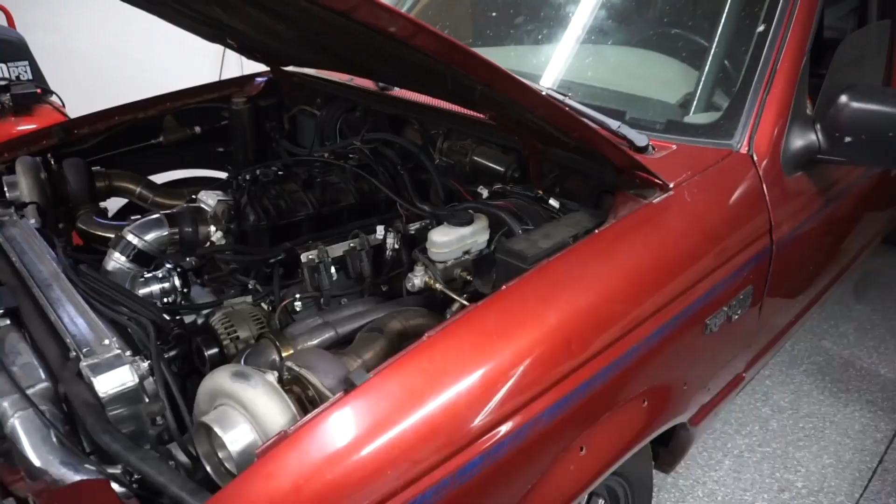So last video at the track, I put the 4-port on it, and I've been kind of working through finding the duty cycle settings. So doing some digging around and talking to other people, I decided to try something a little different with the boost control.

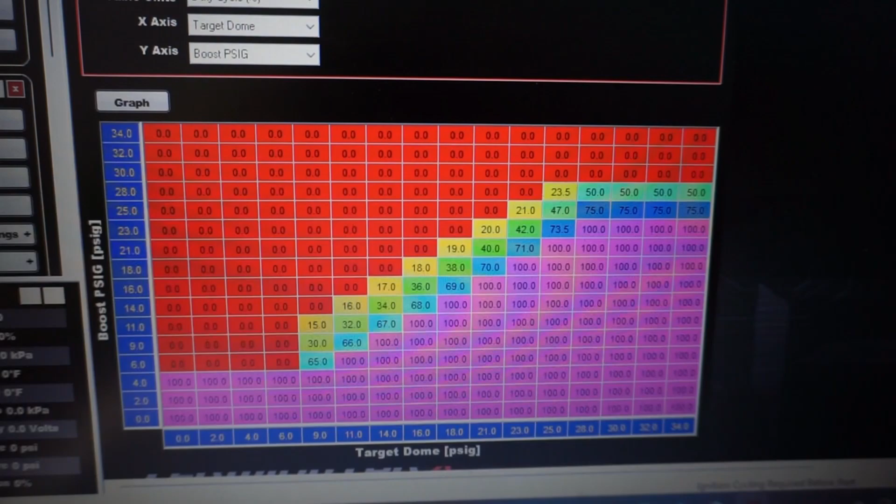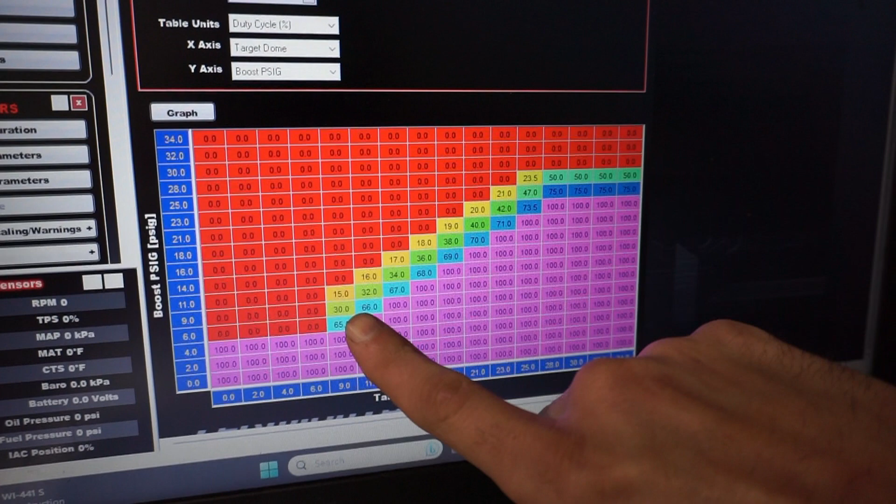So I built this little table here that uses target dome and boost pressure. This is actually using boost PSIG versus a target dome setting. And I forgot to mention it, but this does not use a dome sensor. It does not use the dome map or anything. It just uses map pressure and compares it to target boost. So it doesn't burn an input, doesn't need a dome sensor.

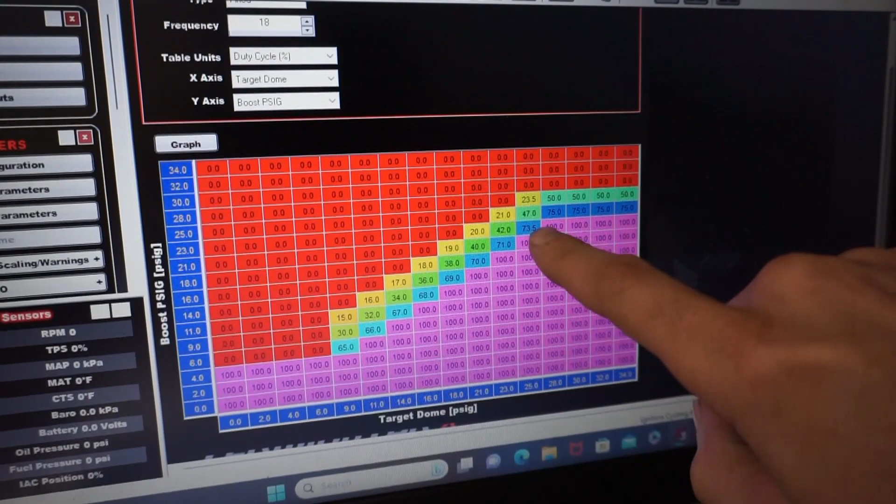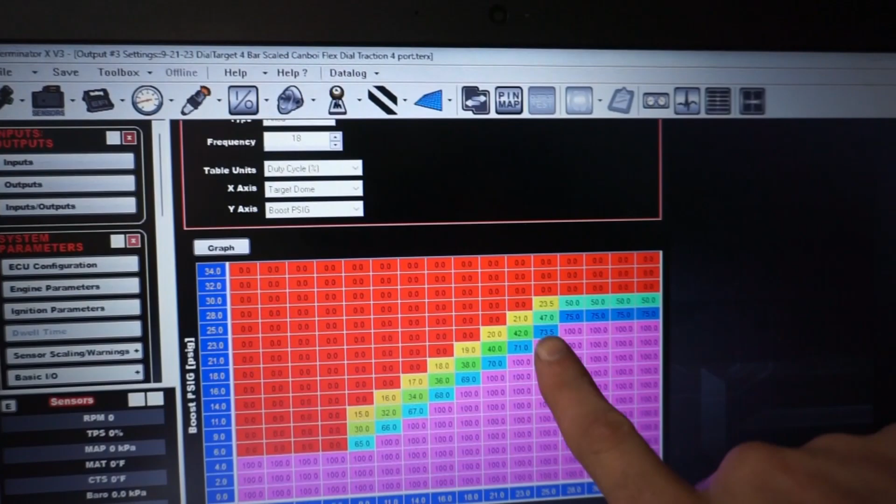Essentially all through this range would be like my guess for a duty cycle, what this is going to be. And what I did here is I used my same settings, or similar settings that I used in my Yellow Mustang. The Yellow Mustang was also a twin turbo setup, and it had twin 44mm wastegates with 6-pound springs in it. So I was using 15 hertz, and about 47% on that one made 22 pounds. So I'm using similar settings here, 18 hertz, and 47 is I just have it targeting around 25.

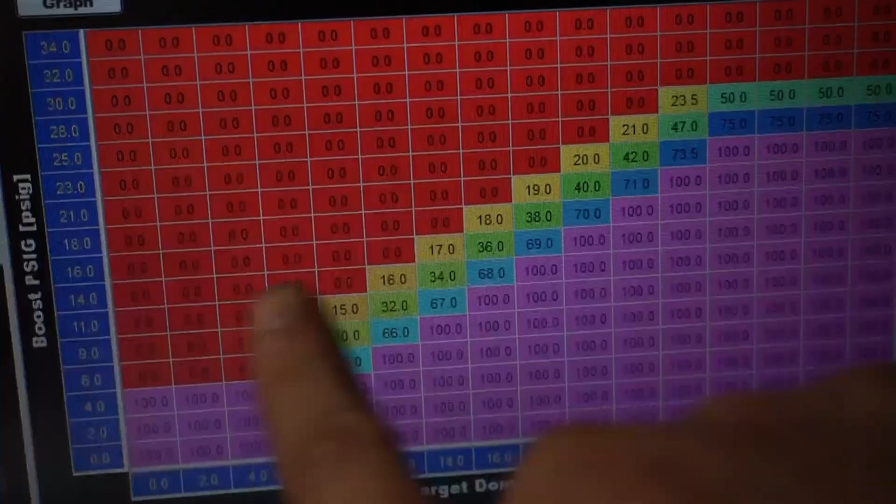So what this table is going to do is these green ones are like my target for what it should make, like if I go 18 pounds and 18 pounds, so this is what I'm targeting, and then this is going to be what actual boost it's making. So then it's going to give it duty until it gets to this target range, and then if it overshoots, it will pull duty cycle out of it, hopefully to keep it back in that range.

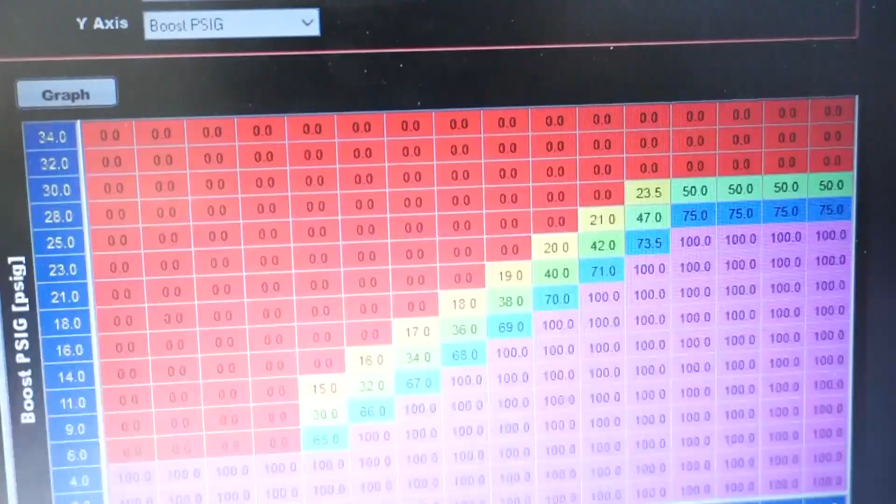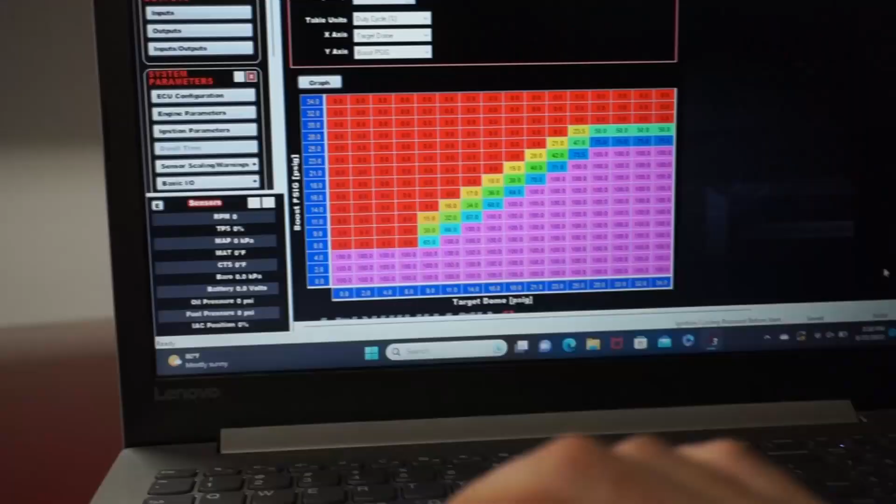And then at around 30, 28 to 30, it just goes to 0. So even if it does overshoot, it kind of has like a built-in revert-to-wastegate feature, because it just drops it down to 0 duty if it goes over 30. So I'll go over this a little bit deeper when I get it to work with the screen recording.

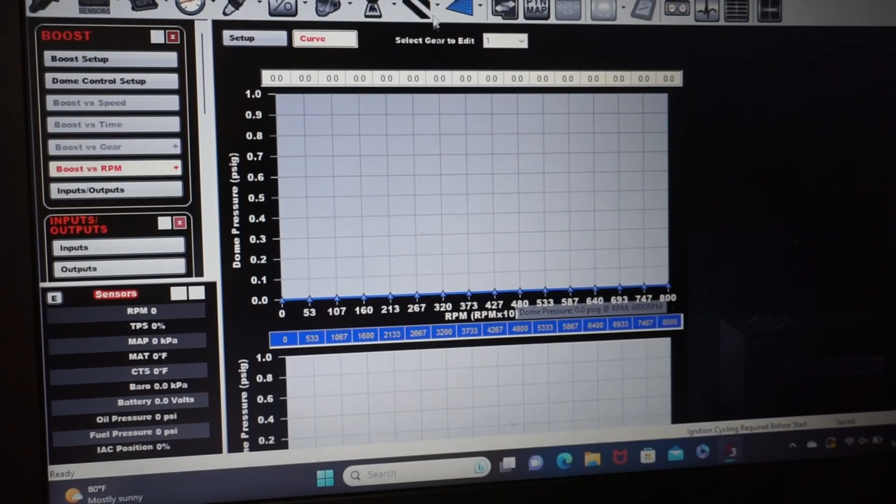But essentially what I'm doing here is I'm using the boost versus RPM, and then I'm offsetting this table with a 2D table. My 2D table, because I'm using the dial-a-boost, I wanted to make that work. So essentially what I have is RPM versus dial position, and then I changed all my dial numbers to match what my target boost number should be.

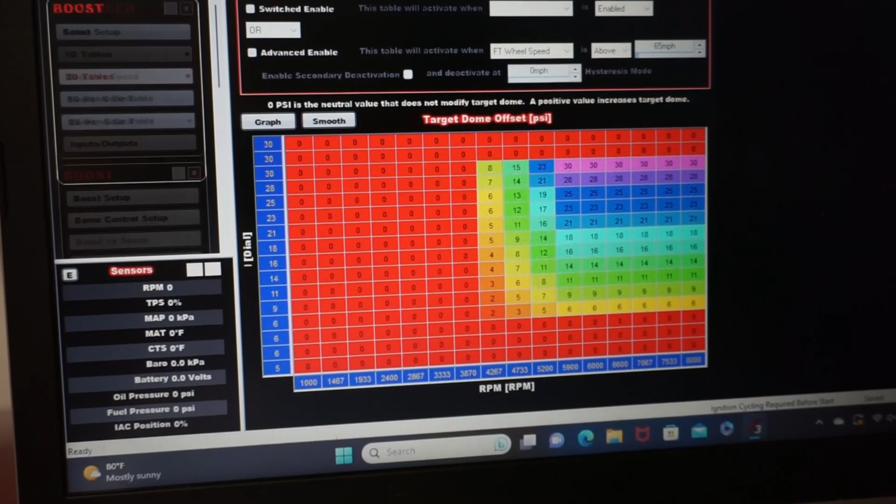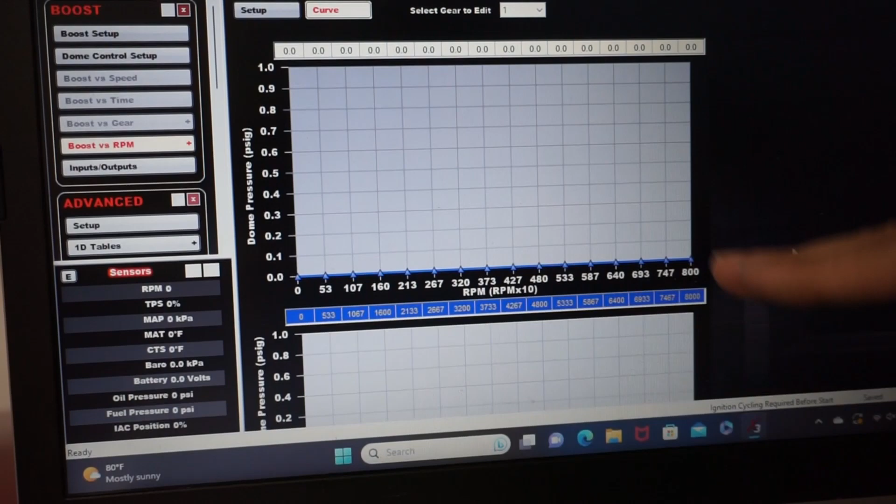So like 6 down here all the way down is 6 pounds of boost because it's a 6-pound spring, and it makes about 6.5. And then as I turn it up, what these numbers are going to be doing is offsetting this boost versus RPM curve. So those numbers are going to be offsetting this one as I turn it up. Then I don't have to mess with this table at all. And then it'll apply for each of my boost settings.

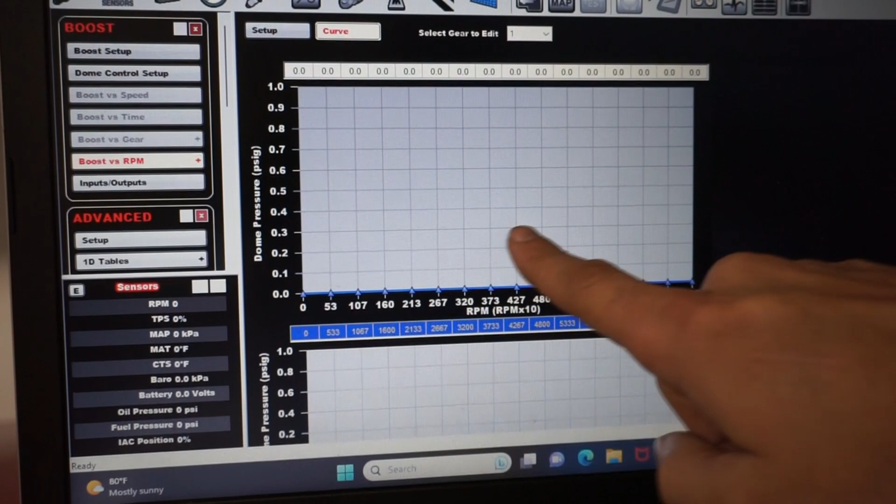Because if I were to just offset this whole table, like if I go to 6 and then I decide I want to offset that table with the dial-a-boost, if I add 10, it's also going to add 10 to my low RPM, which I don't really want to do. I want to have my low RPM and launching stuff still around the same, but then just ramp it up. So I'll go over that in a little more detail.

I'm going to go take it out and go drive it a little bit and try to dial in some of the numbers. I haven't driven it on this yet, but the concept is there in my head. I feel like it should work.

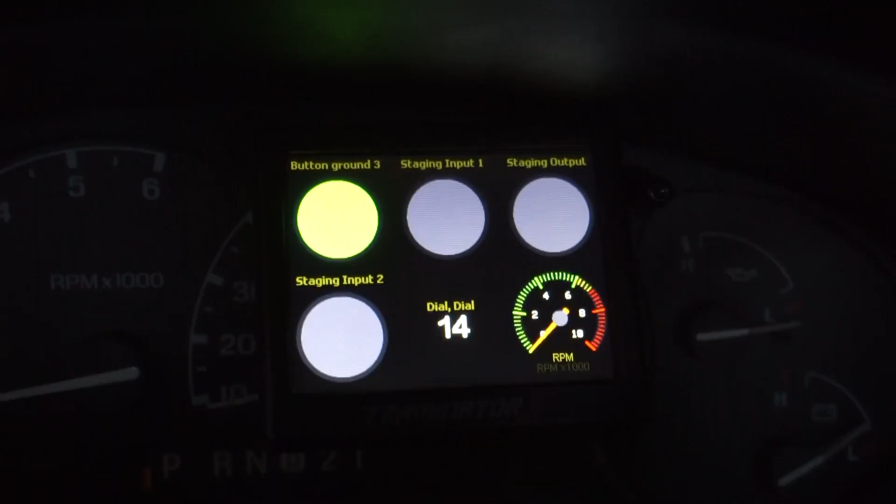And then I also changed how I'm doing my trans brake and bump. I'm not using the staging input output. I made some custom output tables for brake and bump, so I can go over that stuff too if I get that to work.

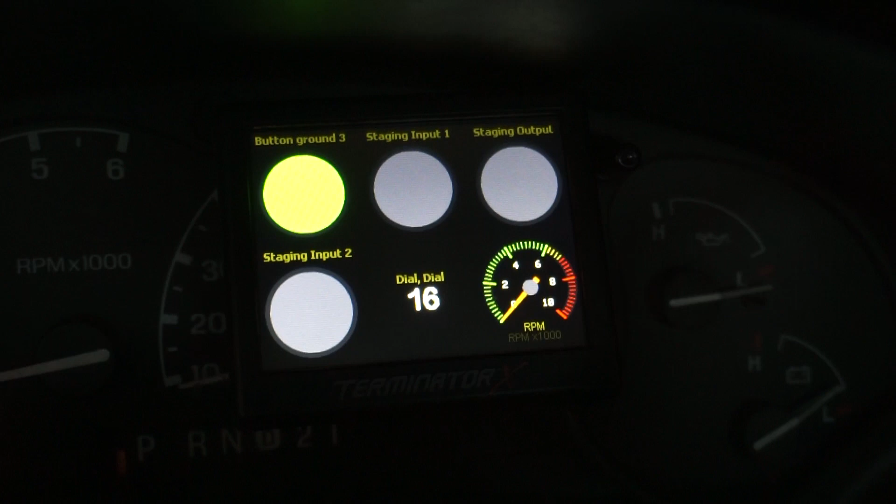And essentially what I have now on the dial, all of these numbers represent a target boost number. So I want it to target 6, it's all the way down right now. That's at 6, all the way up will be 30. So the dial number corresponds to what the boost number should be. So what I'll do is like 16 pounds, I'll dial it in right there, whatever the duty cycle is that it needs to make 16 pounds.

That's what I'll put on that one. And then I'll just continue to do that. So that way I don't just have like a 1 through 10 or up or down, I know exactly what the target's going to be.

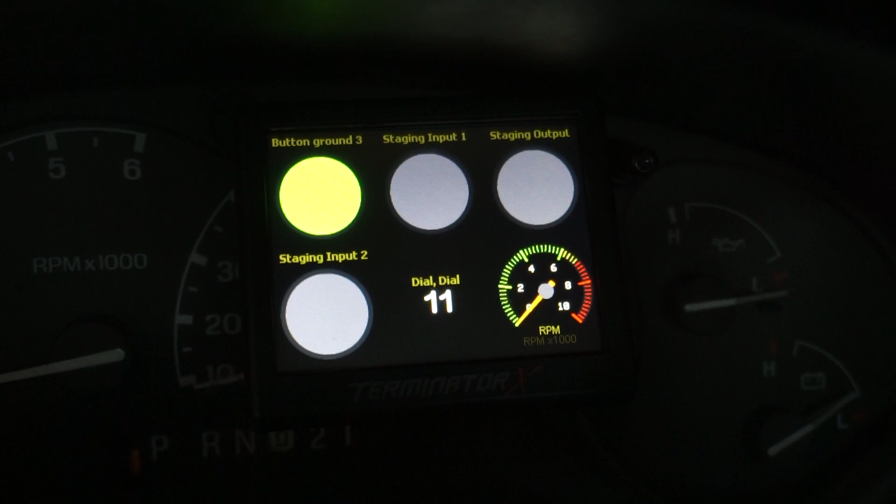All right, well, I figured I'd do some recording because I was just doing some trans brake testing, and now I just hurt my neck. So it went from not bumping at all to way aggressive, and I wasn't expecting it, and now my neck is actually sore. So what I've been doing is kind of creeping down on it. I started at 16 hertz, and then I went 50% duty cycle, and I was creeping down the duty cycle until I got to 16 and 33, which is where I was on the single pulse before.

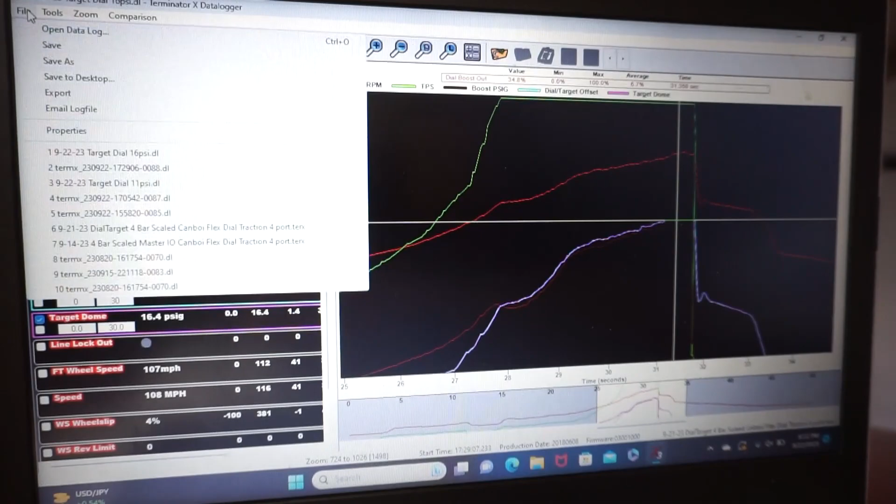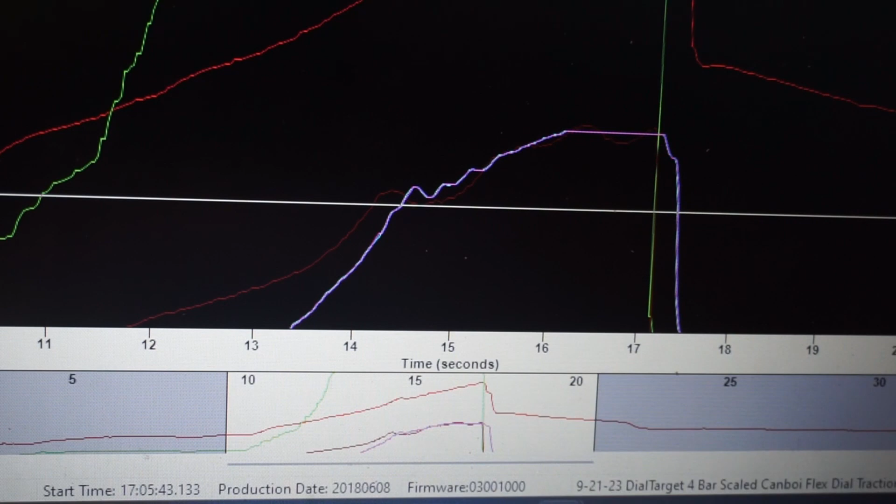So I'll bring up another one, an 11 PSI run, and you can see pretty much the same thing. The target and offset come up, and the boost line pretty much follows it exactly. Now I'll add the dial boost output, and you can see how the dial output is modulating itself to maintain that boost level.

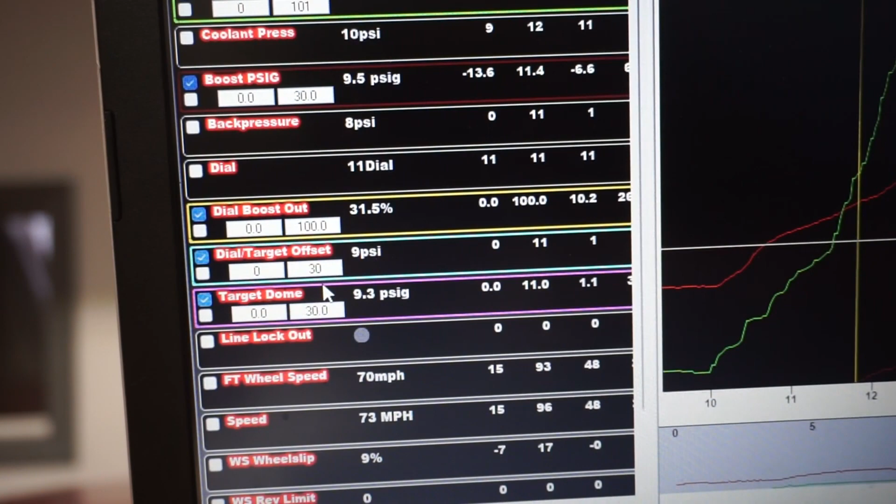Dial is at 11, that's my dial position targeting 11, actual boost is 10.7, target offset is 11, target dome is 11. Pretty much anywhere I click on here, we're at 10.1 there, 11, and now the target is 10, and 10. If I click here, the target is 9, 9, and it's making 9.5. Actual boost is 7, and the target offset is 7, 7. So it follows itself pretty decently.

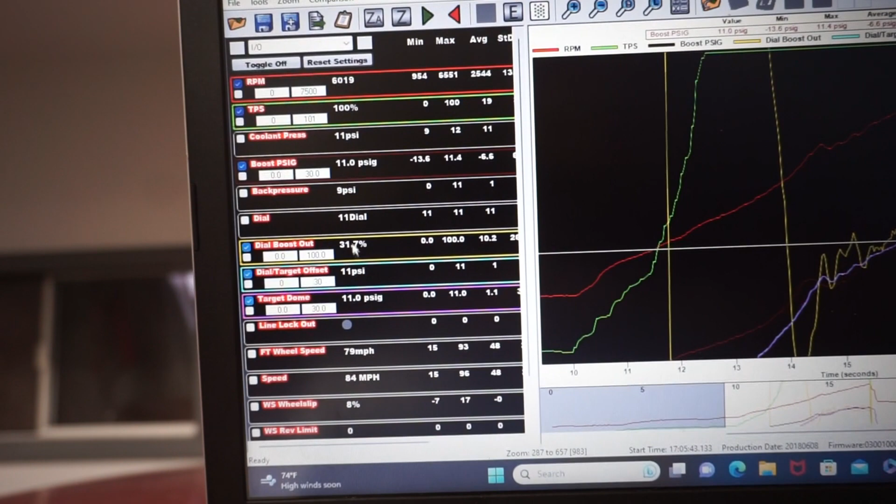If we look right here and add the dial out, right here it's making 11 pounds, targeting 11, target dome is 11, and dial boost out is at 31%. Right here, in that position I actually had 36% in there, but what it's doing is pulling down to 31% to try to maintain that number.

Alright, so I'd say that little bit of monkeying around was successful, both things seem to be working. I'll do separate videos on those because I feel like it should be two separate videos since I was doing two different things. So I'll do a separate video on the smooth bump stuff, and then a video on the boost control and how I got that set up. But so far it looks promising.